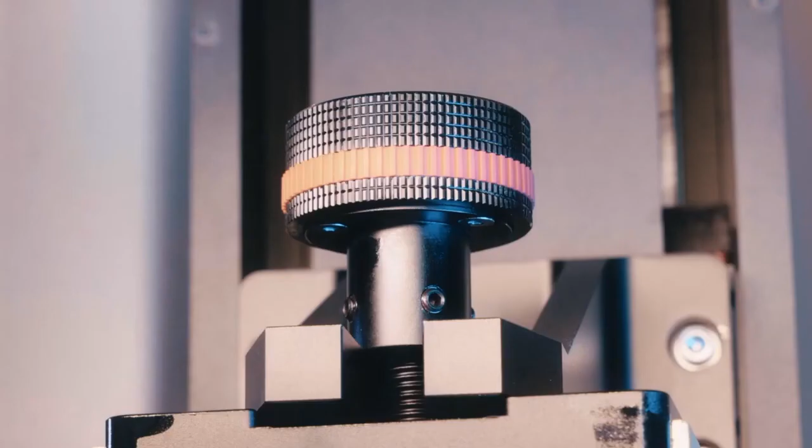Today, we are glad to introduce our latest 3D printer, AccuFab-L4D.

Before using AccuWare, registering a Shining 3D passport is recommended. You can do it by clicking Online Registration and filling in the information required.

Check the printer serial number and make sure it matches your printer. Then, select desired material and layer thickness. Open the file. You can also import recent files from the list.

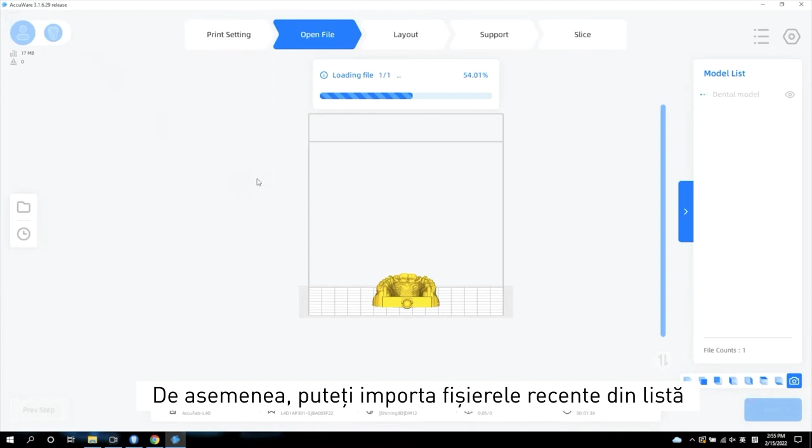Printing details including printer serial number, material type, total layers, and estimated time cost are shown at the bottom. On the right, there is a model list and all models are displayed. You can choose to hide any of them or not.

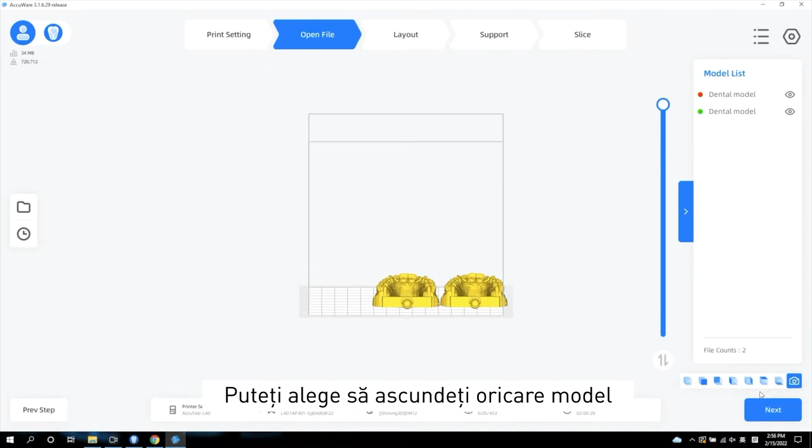Here are different views for models. You can move the dental models with the mouse, or you can move it by entering figures for the X, Y, Z axis. You can rotate the models in the same way.

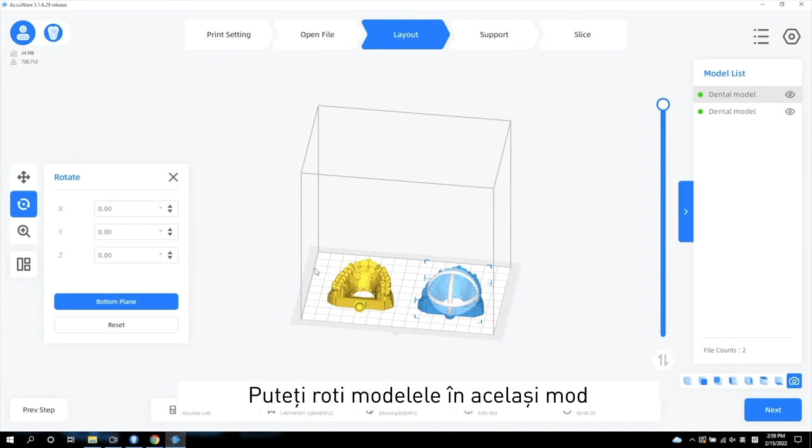For this Bottom Plane function, it requires you to choose a plane as the bottom surface. Then, the models will be rotated automatically with this plane down.

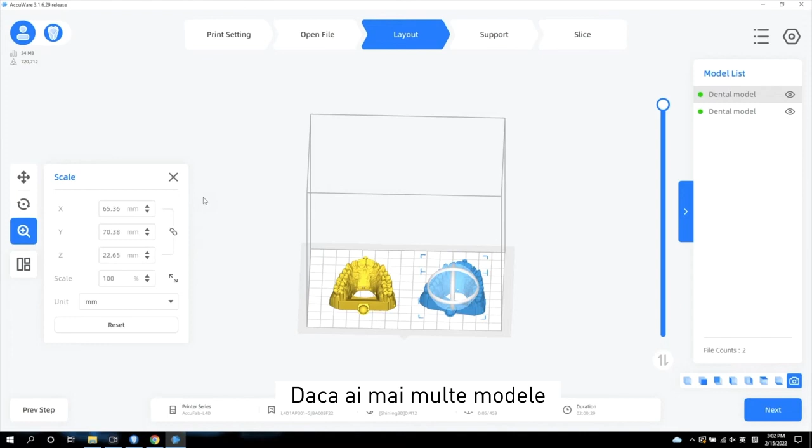In the Scale section, you can scale the models up or down. If you have multiple models, the Auto Layout function would be helpful. You can enter minimum space between models and click Confirm to generate the layout.

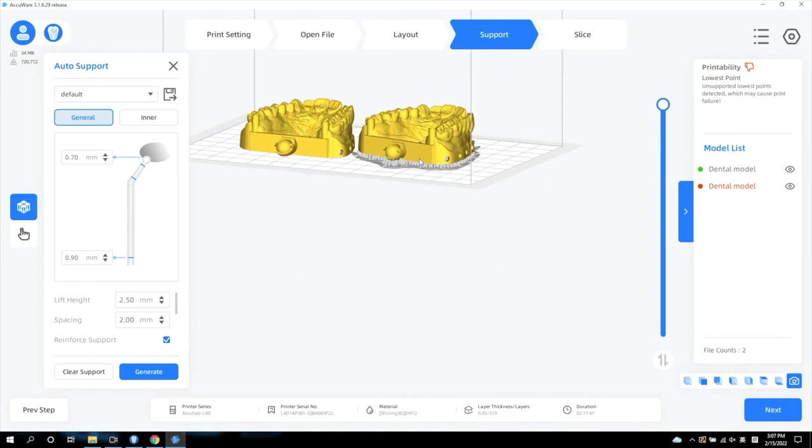In this step, you can add support by using the Auto Support function. You can check each slice layer and height by sliding the bar on the right. If you find somewhere to be adjusted, you can click Manual Support to do it.

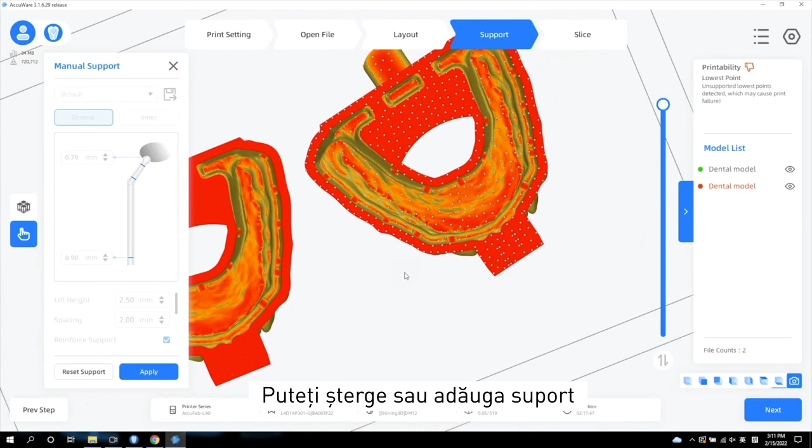You can delete or add support by clicking Support Points. And you can delete multiple points by selecting an area.

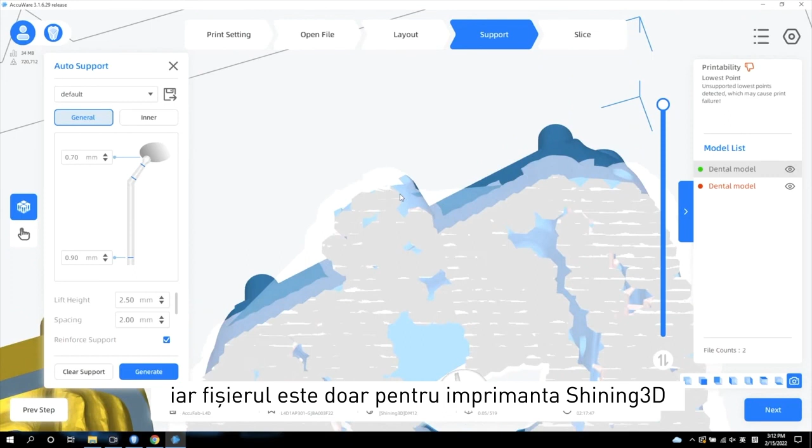Click Slice and an SLP4 file will be automatically generated. This file is for Shining 3D printer only. Then, you can use a USB drive to copy it to the printer, or send it wirelessly to the printer with the laptop and printer connected to the same network.

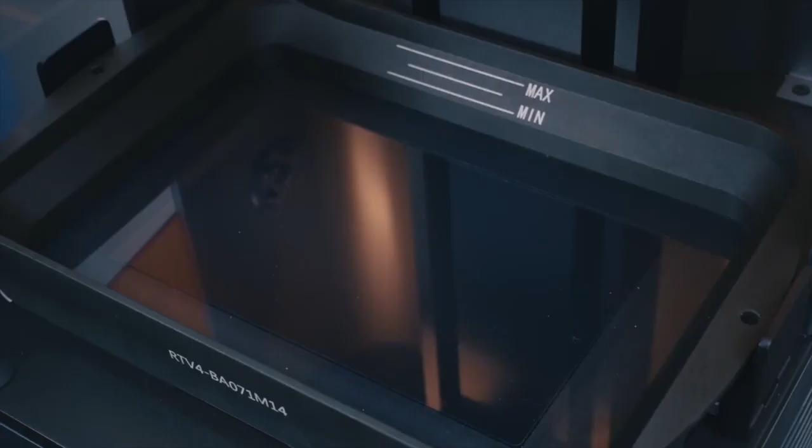Add resin. Click the flash drive icon and select the print job.

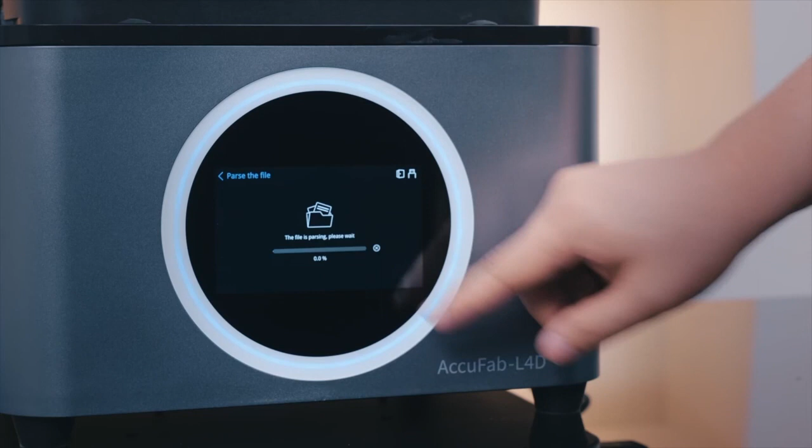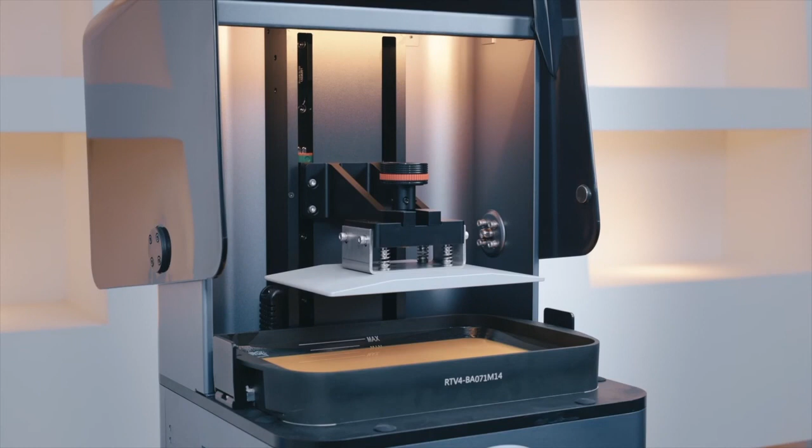In the setting menu, you can load or save the project. We have a built-in accuracy calibration wizard to help you adjust the accuracy for the printing material.

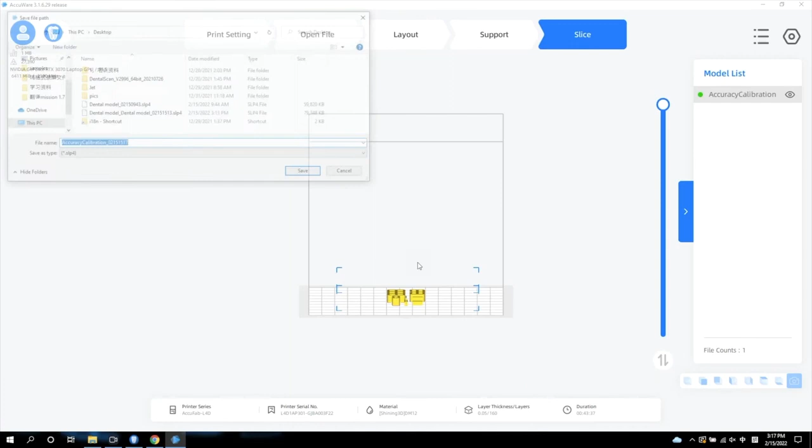The first step is printing the calibration model. When printing is done, go back to the wizard, check this box, and click Next. Measure the printed model and fill in the measured figures in all blanks and click Next. The compensation will be done and adapted automatically.

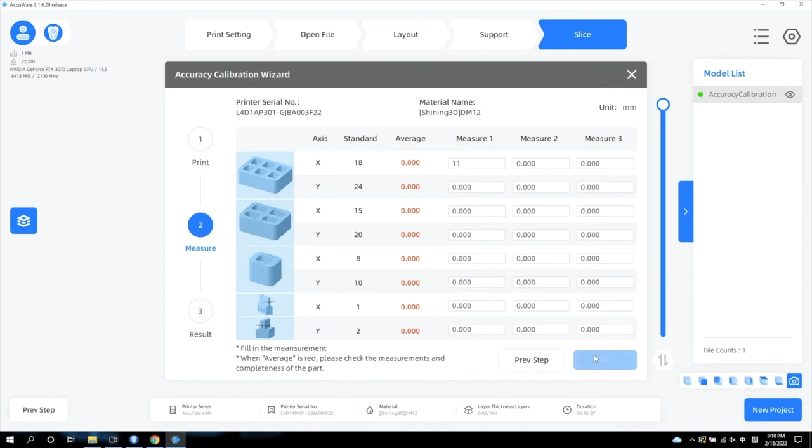In the Material Manager interface, you can manipulate the basic parameters for the material and support. Advanced parameter settings will be activated under Engineer mode.

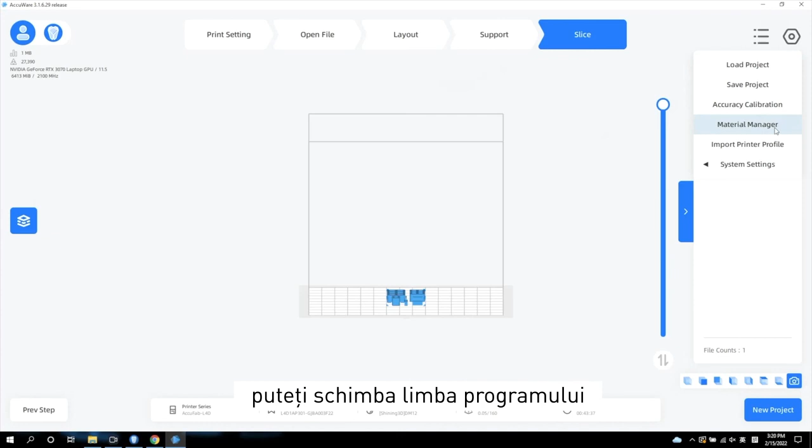In the System settings, you can change software language and check updates for the software and material package.